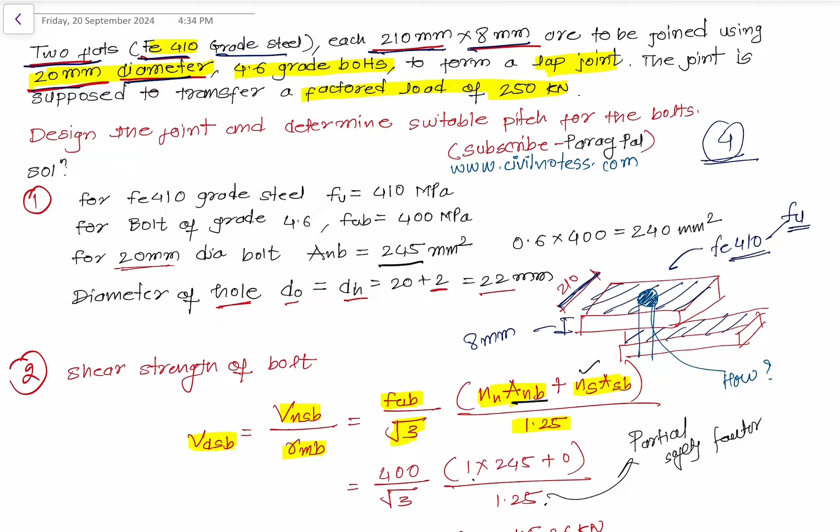These two plates are to be joined using a 20 mm diameter bolt. So we are going to design this bolt, which will join these two plates. Now we need to calculate how many bolts we require and what would be the distances - edge distance and pitch distance.

After identifying all these things, we need to form a lap joint. The joint is supposed to transfer a factored load of 250 kilonewtons. So we do have a load value in place. Now we need to design the joint and determine the suitable pitch for the bolt - that is the concern.

Whenever they ask us to design the joint, it means VDPB and VDSB are the two values we need to calculate, and whichever is smaller will be taken for consideration in the design of the bolt joint. We also need to calculate the pitch distance.

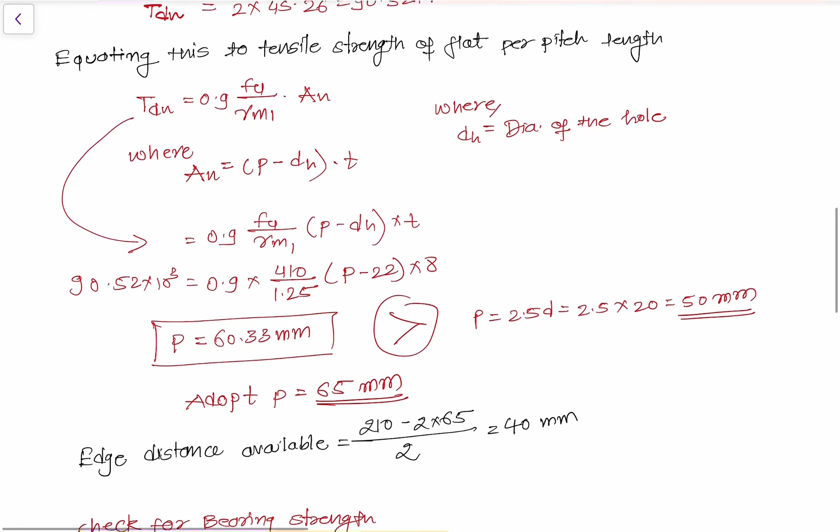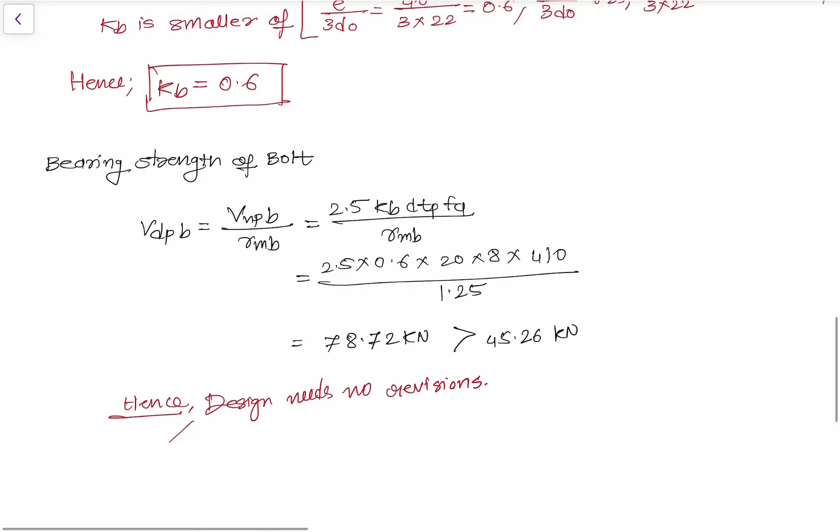Now you can see, I have already calculated the VDSB and the VDPB. Let me show you so you can understand from the start of the numerical itself. You can see the design needs no revision because VDPB is 78 and VDSB is 45. So these are the two values we need to calculate.

Now remember, if you see lots of things written here, no worries at all, because the formulas are already given in IS code 800:2007, which is the limit state method IS code for Indian standards, and all these formulas are mentioned there. This is one of the very important numericals for all of you.

So first, let's understand the calculation of the shear strength of the bolt - first we calculate VDSB. The formula is VNSB upon gamma MB, where gamma MB is the partial safety factor. VNSB has a concise formula: FUB upon under root 3, times NN into ANB, NS into ASB, divided by 1.25, which is the value of gamma MB.

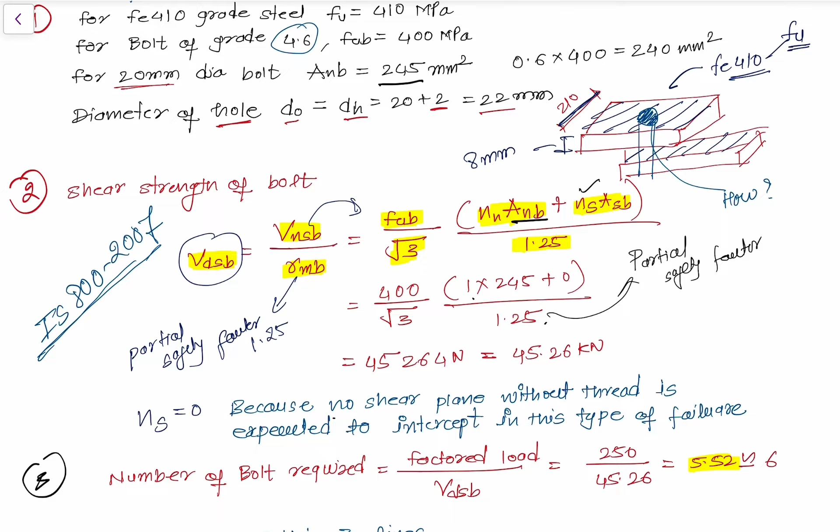Now put in all the values: FUB as 400, NN equals 1, ANB we have 245, but we put NS value equals 0 because there is no shear plane without thread expected to intercept in this type of failure. So in this type of failure, we are not expecting any shear plane - that's why we keep NS equals 0, so this whole function becomes 0. Putting in this value, you get VDSB as 45,264, meaning 45.26 kilonewtons.

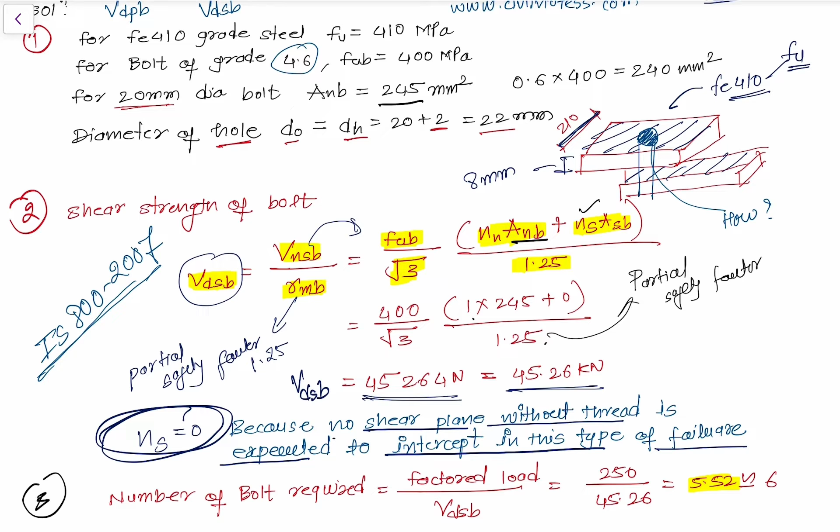Now let's calculate the number of bolts required. You can see the diagram - this distance defines the pitch distance, and this distance defines the edge distance. All these things I've written here are very important for all of you, because without this you can't solve steel structures numericals.

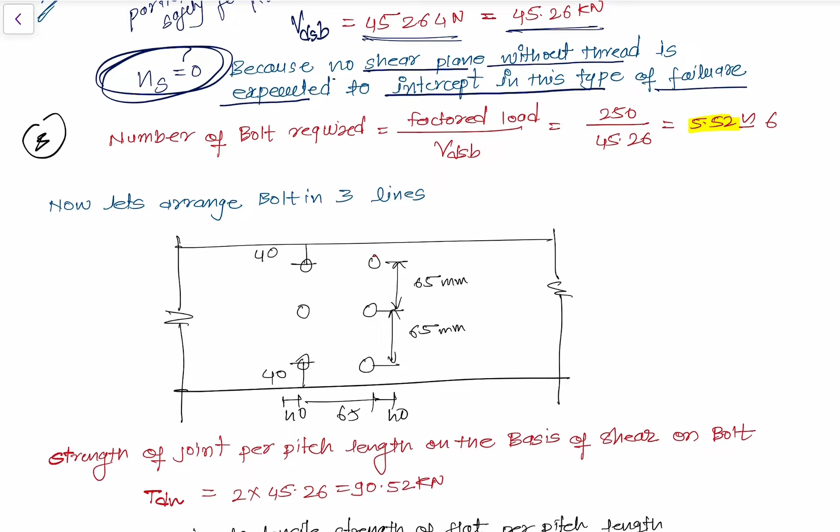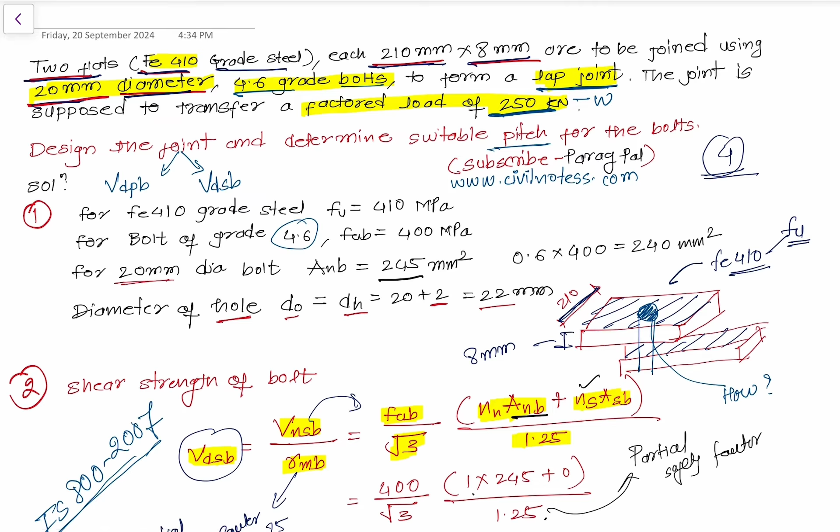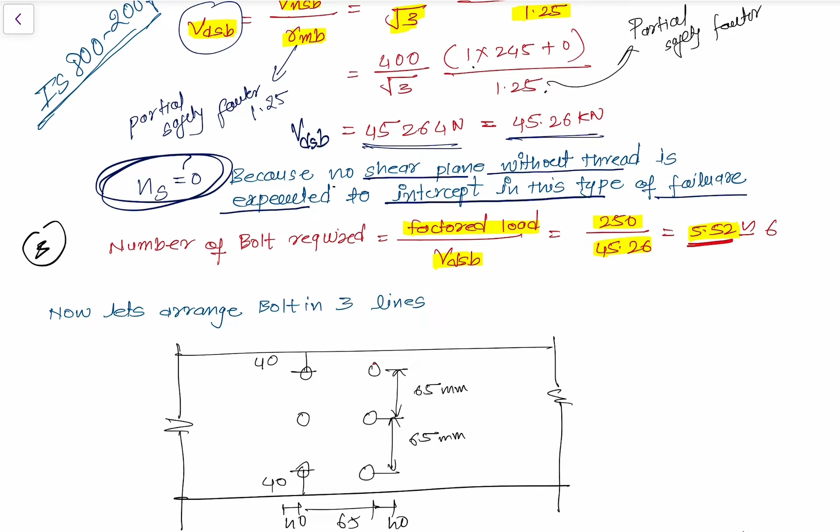So now let's calculate the number of bolts required - how many bolts do we need with respect to this design value? We already have a factored load of 250 kilonewtons, and we need to divide that by VDSB, which is 45.26. So the value becomes 5.52. We can't put the value of bolts as 5.52, so we round up to the next figure, which is 6 bolts.

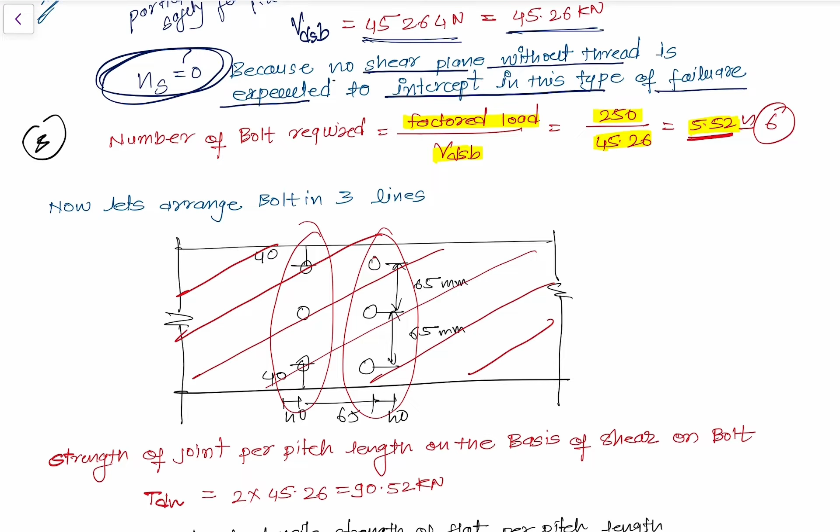So you can see this is a plate. In this plate, we are assigning these two lines - 3 bolts on this side, 3 bolts on this side. This is the way we are going to design the bolts. Don't look at the figure right now, because that we need to calculate.

This figure we need to calculate. I just skipped here because I wanted to show you how it will look like. Now you can see the strength of the joint per pitch length on the basis of the shear of the bolt that you need to calculate.

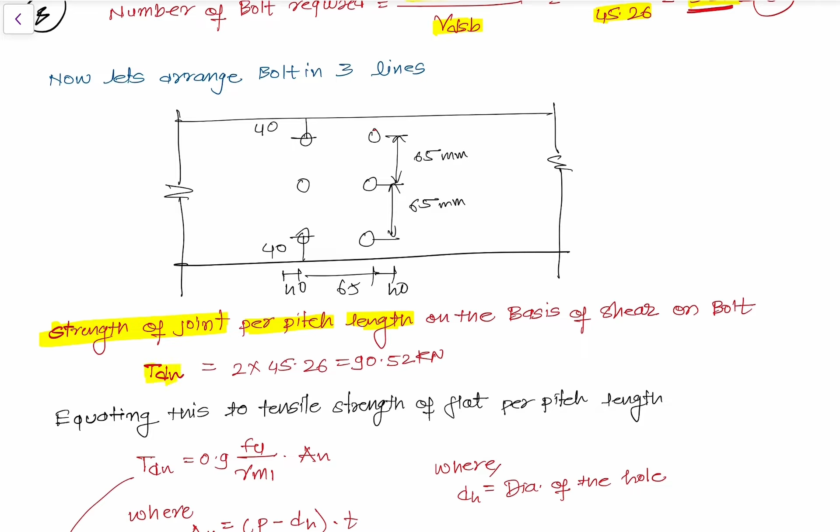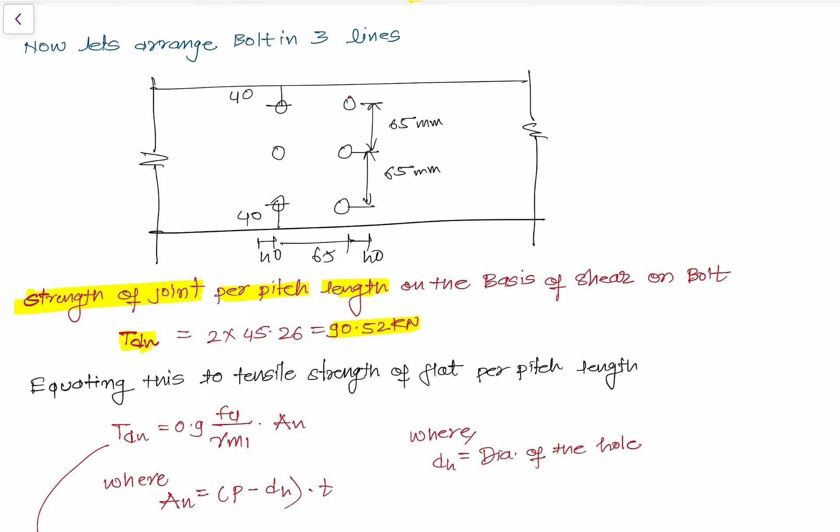So strength of the joint per pitch length is calculated as TDN, where you multiply the value of VDSB by 2, giving 90.52. This is a simple calculation. Once you calculate the shear strength of the joint per pitch, you use that to identify the pitch length.

The formula is TDN equals 0.9 FU upon gamma M1 into AN. Now let's understand AN: it's pitch minus diameter of hole, into thickness. Just put this value of AN in, so the formula becomes TDN equals 0.9 FU upon gamma M1, P minus DH, into T.

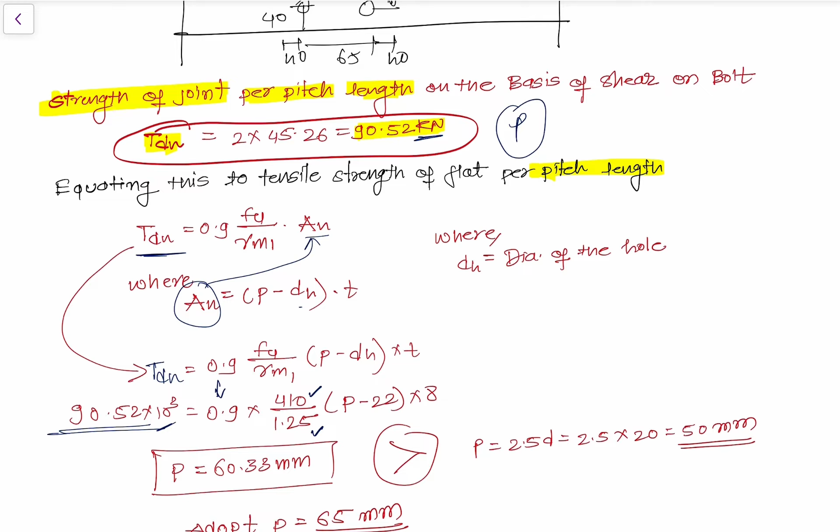Now put all the values. We have TDN value of 90.52 kilonewton, converting to Newton gives 10 to the power 3 equals 0.9 as it is. FU is 410, gamma M1 is 1.25, pitch we need to calculate minus 22, into 8 which is the thickness given at the top.

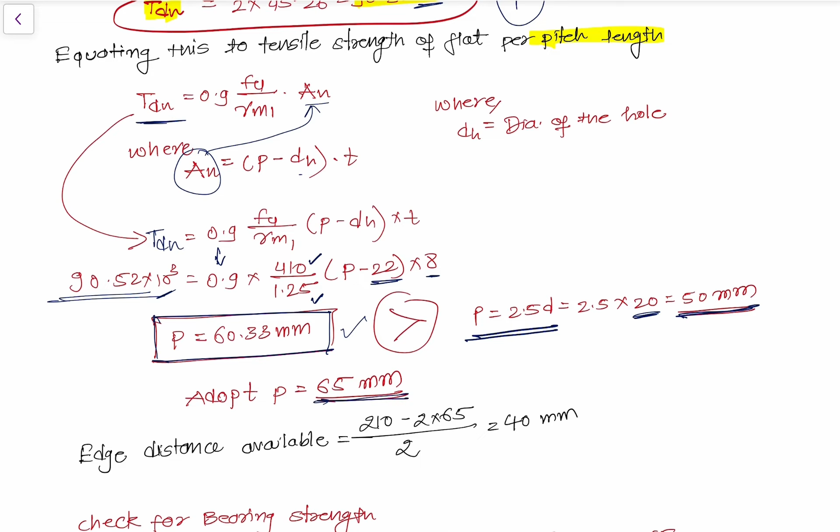Once you solve this in your calculator, the value of pitch equals 60.33. Now check this value against the formula pitch equals 2.5 into diameter, so 2.5 into diameter of 20 of the bolt is 50 mm. Whichever is higher, take that one. So I'm taking 60.33, but I cannot assign 60.33 directly as the pitch, so I'll add up to the next similar value of 65 mm as the pitch.

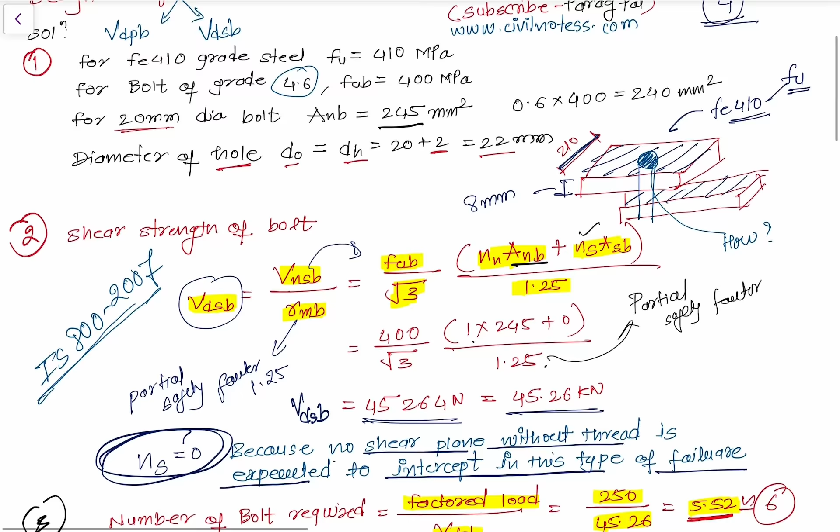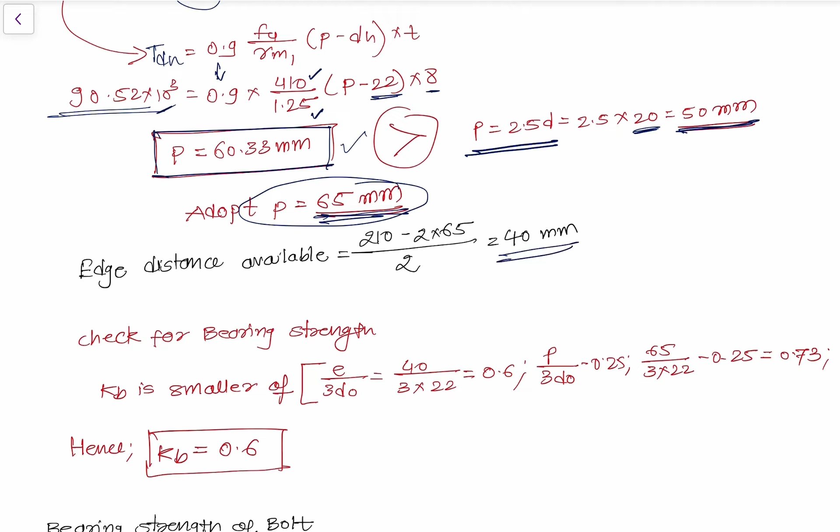Now let's identify the edge distance. The calculation is simple: whatever the total edge length is, 210 mm, so 210 minus 2 into pitch distance, divided by 2, gives the edge distance E. Now we have the pitch distance and edge distance, so we mention edge distance and pitch distance here.

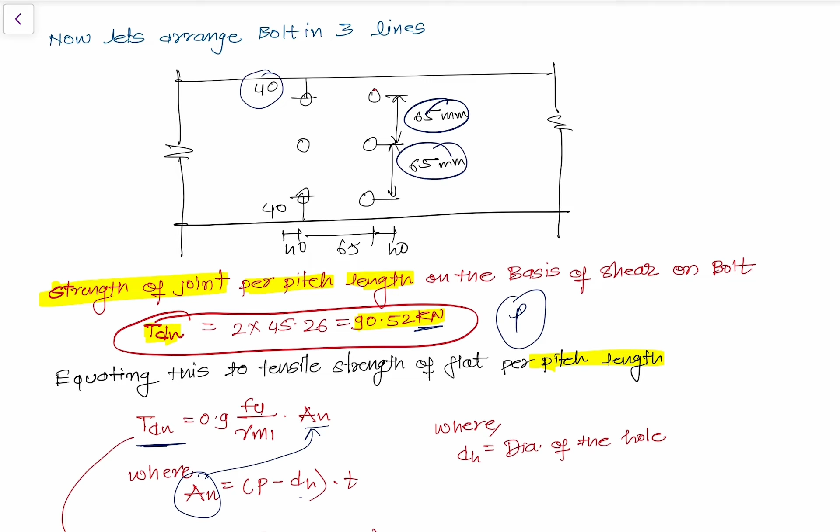After this calculation, we also need to calculate VDPB. The formula is VDPB equals VNPB upon gamma MB. VNPB formula is 2.5 into KB into D into TP into FU divided by gamma MB. This formula is given in IS code 800/2007. Now to calculate KB, this process you need to follow, also given in IS code 800/2007.

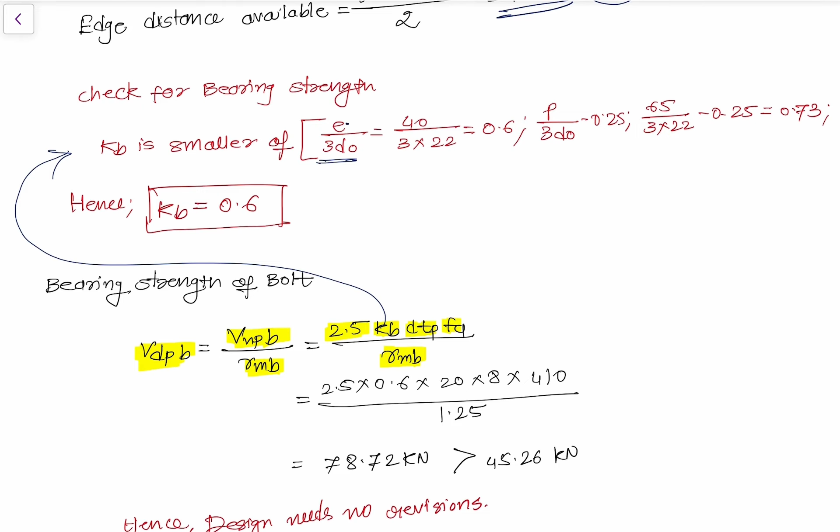So E upon 3 into DO, you solve first. E is 40, 3 into diameter along with the hole is 22, so it is 0.6. This is already calculated at the top. Now pitch upon 3 into DO minus 0.25: 65 is the pitch distance, 3 into DO is 22, minus 0.25, you get 0.73.

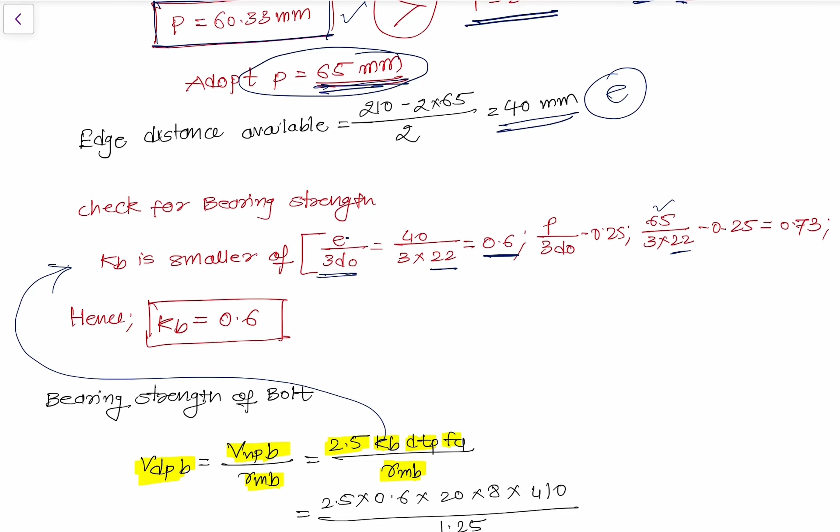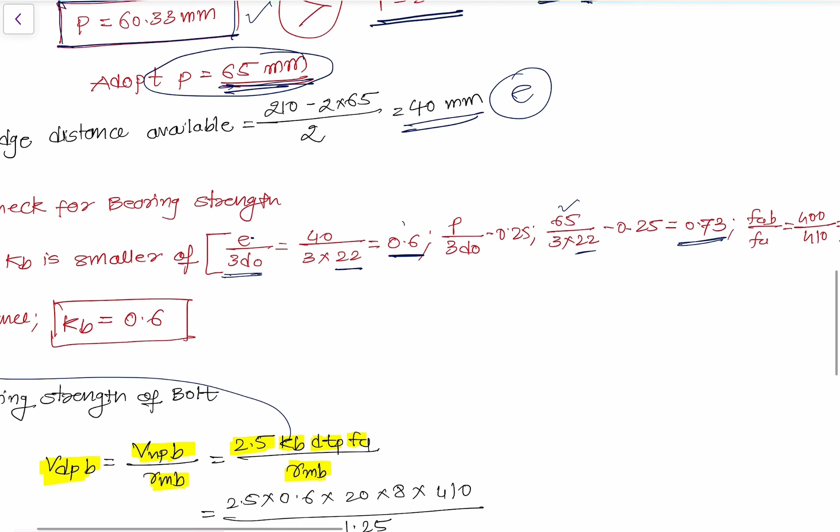Now the next one is FUB upon FU, which becomes 0.97, and 1 is a unit always. Whichever is smallest among 0.6, 0.73, 0.97 and 1, so the smallest is 0.6. It means the KB value is 0.6.

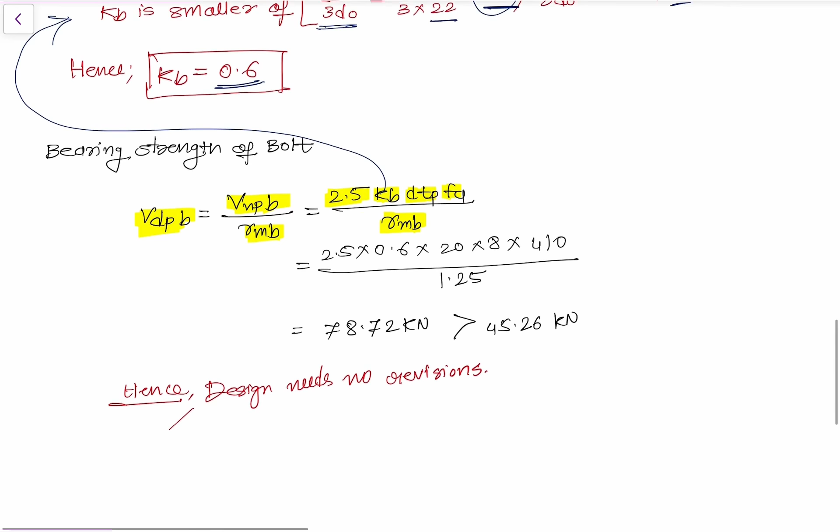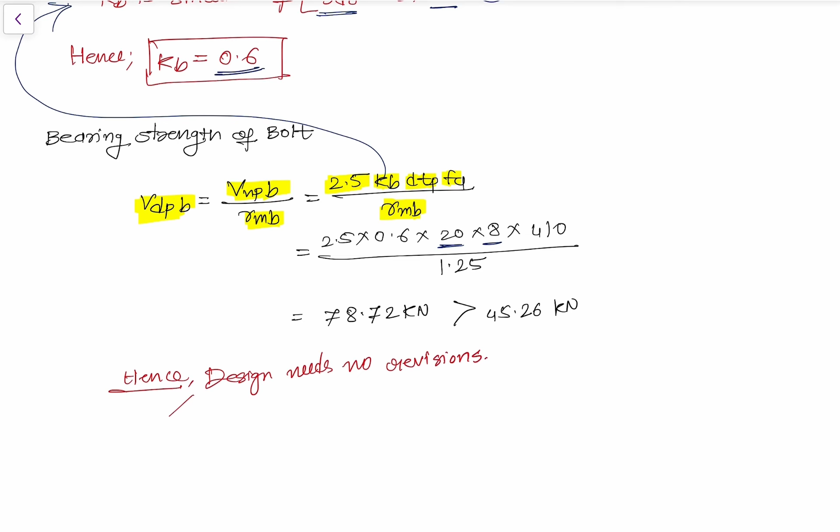Now let's put all the data into this VDPB value formula. So 2.5 into 0.6 into 20 is D, TP is thickness 8, and FU is 410, which is the grade of steel given here, divided by 1.25, which is the partial safety factor, and the value becomes 78.72.

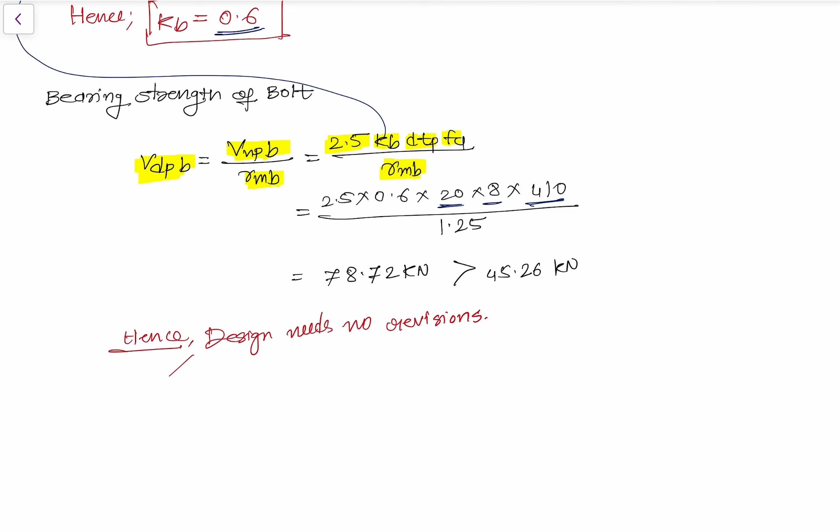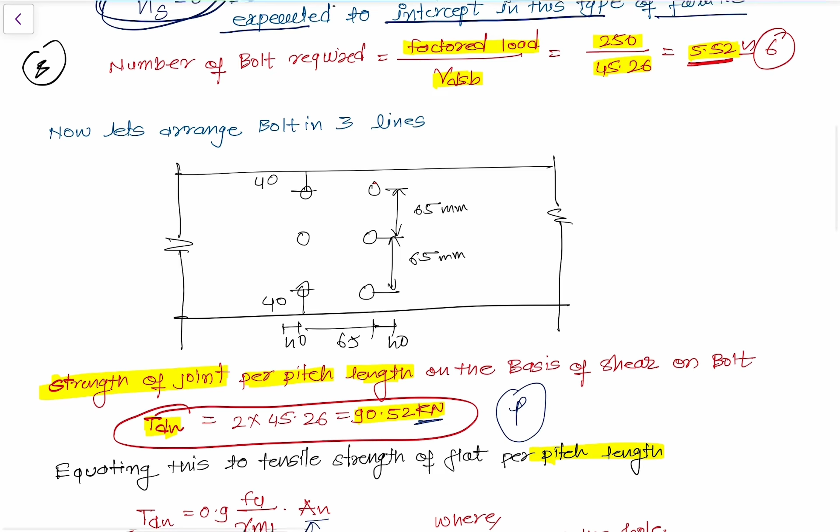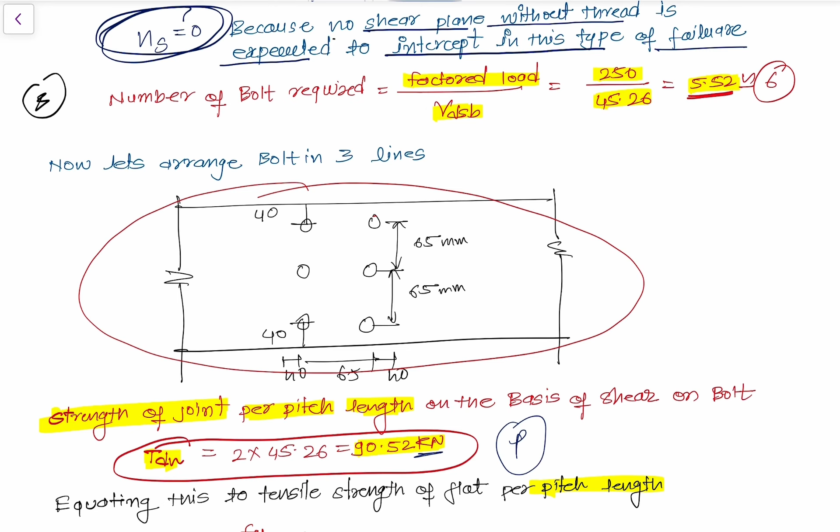Understand that this value is higher than 45.26. It means the design we did at the top, with respect to edge distance, pitch distance and VDSB - we calculated the number of bolts, edge distance and pitch distance with respect to VDSB. But VDPB is higher, meaning we no longer need to design with respect to VDPB. We need to select the smallest value.

If VDPB is smaller than VDSB, then we have to revise our design, and recalculate the number of bolts, and the edge and pitch distance with respect to that. In this scenario, our VDSB is smaller than VDPB, meaning the design we have done at the top is safe and requires no revision.